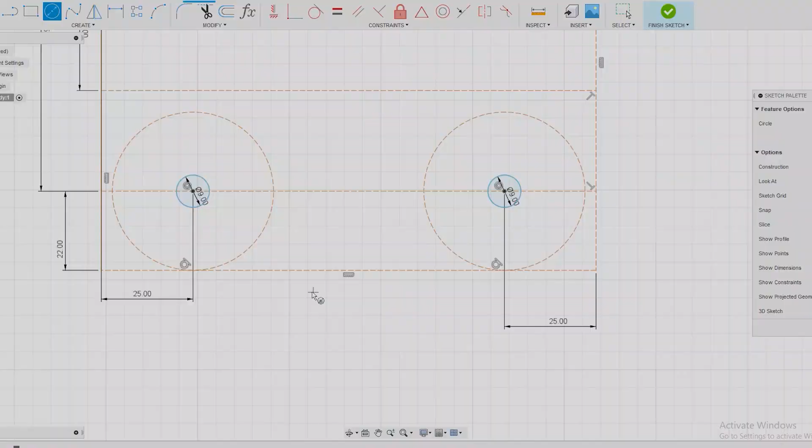Do you have an urge to design a CNC project from scratch on your own, but you don't know where to start? In this video we'll be going from the very first steps of getting started till having the project complete and ready for use. I will be sharing some tips to help you avoid the mistakes that most people make when first designing.

In this video we are going to learn 3 things. First, what do you need to know before designing? How to keep your sketches simple and organized, and how to prepare your design for CNC cutting.

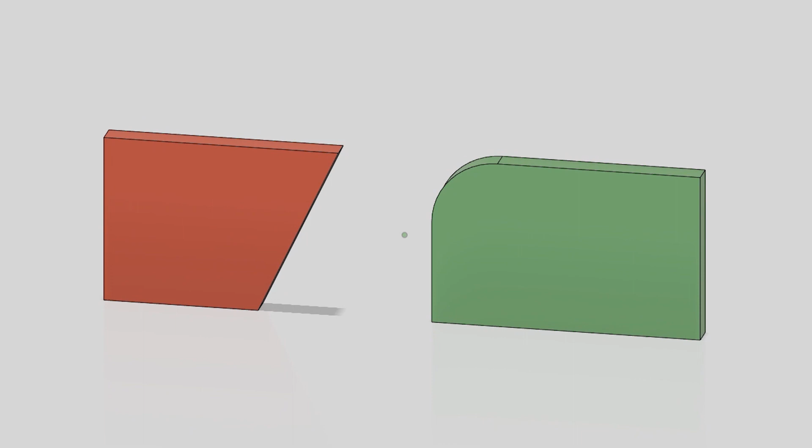In this case, the item will be obviously used by kids, so we should avoid sharp corners. The kids have small hands and it should be easy for them to grip the car. Also, it should be fun to play with.

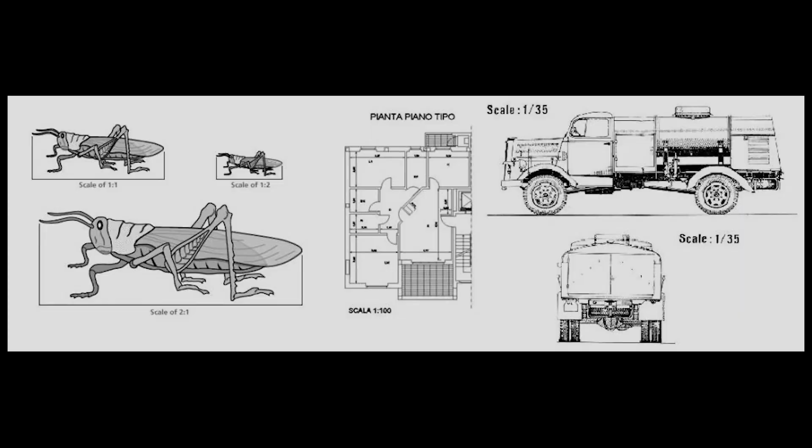For all projects, it's important to do a little research to find out what's already been done, what mistakes other designers have made, and what are the things you could improve to make your design more interesting, more attractive, and functionally better. At this point, it's also important to understand the dimensions, how big the car model should be.

It's important to get the size right, so the car isn't too big or too small. For some projects it's really easy to find standard sizes, but there are times when all you have is a picture of the item and you have to figure out the dimensions by yourself.

When you have the specifics down, it's essential that you know exactly what material you will be using for your project, so you can consider how it's going to be made and what tools you will need to finish the project. And it's something you have to keep in mind while modeling the components.

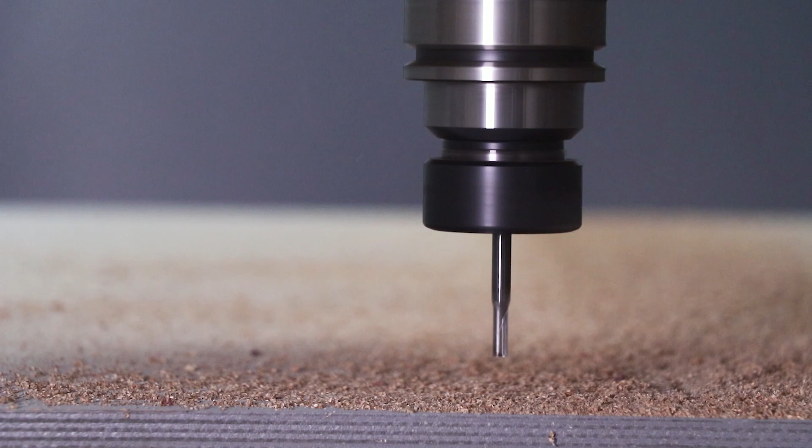For this toy car, we will be using 18mm plywood that can be easily cut with a 6mm router bit. Also, for the wheel axis, we could use 8mm dowels that are available in every wood shop. When you know exactly what you're gonna make and the materials and tools you will be using, it's time to start modeling.

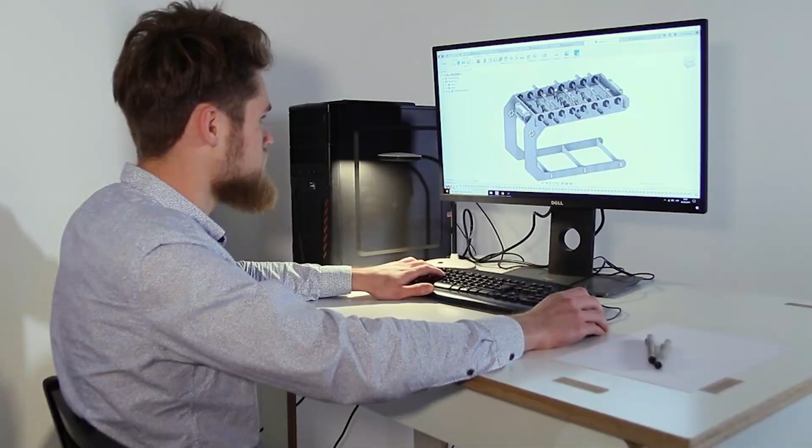Personally, for most of my projects I'm using Fusion 360, but there are some ideas and principles that you can implement in different software as well. First of all, it's extremely important to keep everything organized.

If you are using Fusion 360, keep every part as a separate component. It's easier to find it and edit them if you need to. If you are using different software, using layers is a great option. Also, I strongly recommend naming the components or layers correctly and not using random symbols.

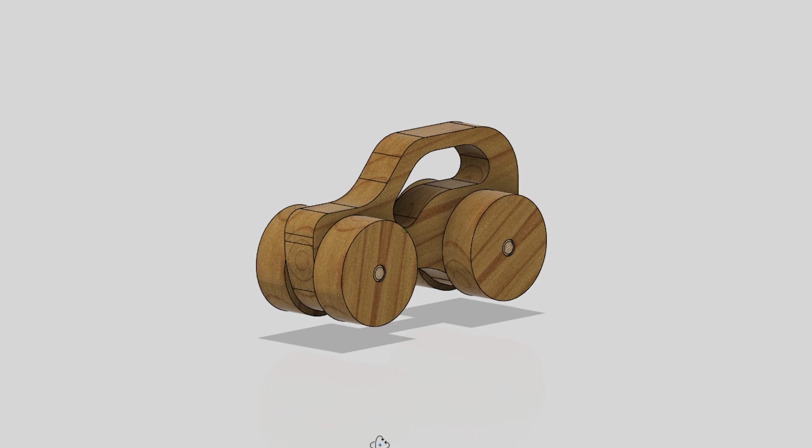It may not matter for a small project like a toy car, but it really does when modeling more complex items with more components. I will not talk much about the sketching itself in this video, but learning and understanding the tools you have available in your software can make the work way faster and more enjoyable.

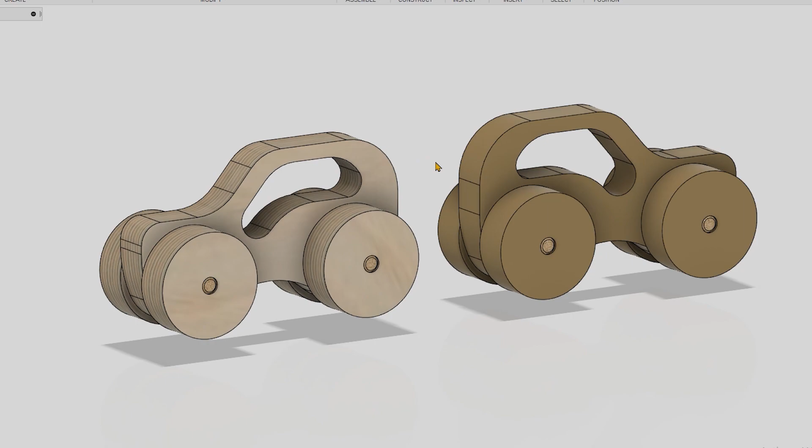Also, understanding the material is essential, so you know how detailed you can make the components and whether they will be durable in the long term. For example, this section would be fragile if made using an MDF board, but when using plywood it should last for years.

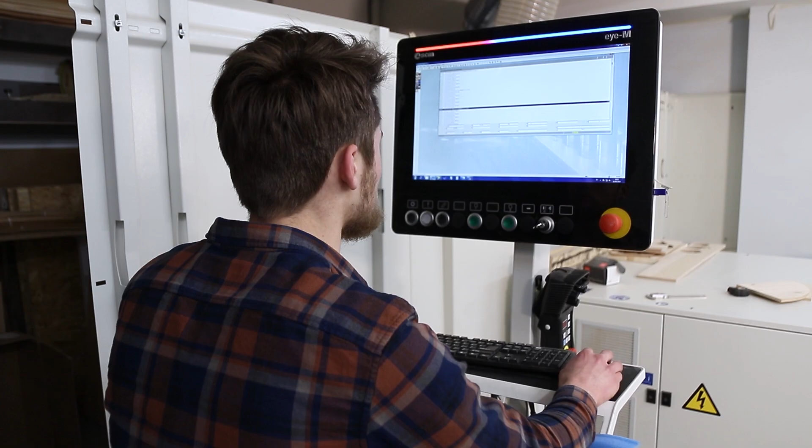Let's go to the part where we prepare the design for your CAM software. This is fairly simple to do, since we need only the outlines to make the toy car. However, there are some things to consider before exporting the DXF file.

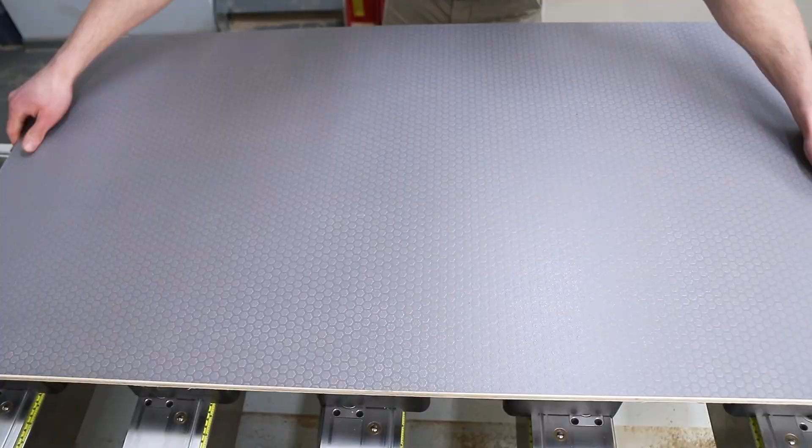At this point we have to know how we are going to attach the material to your CNC table, so we can take into consideration, for example, the location of screws or vacuum cups, so we are sure we don't hit them while cutting.

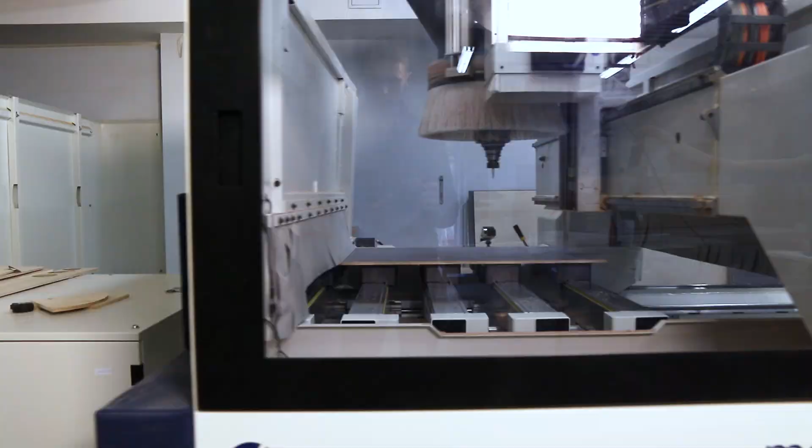Also, the distance between components is very important. To ensure the best quality of cut, it's recommended to leave a little offcut between the components. The size of the offcut can vary based on the way you attach the material to your CNC table.

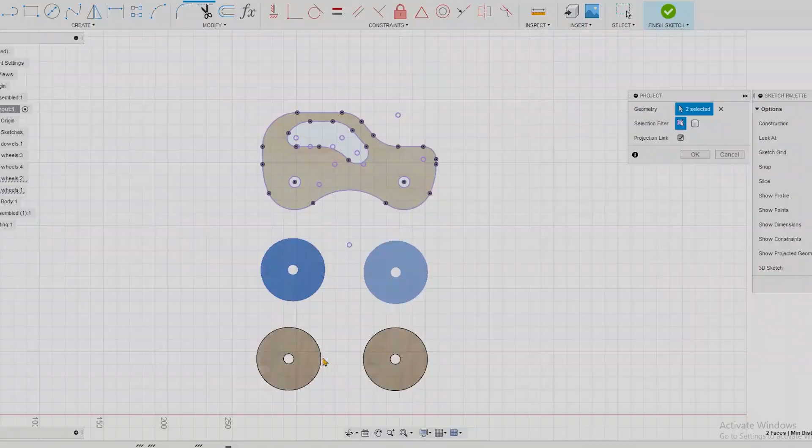In this case, we are going to use a 6mm router bit, so I think the minimal distance between the parts should be at least 15mm. After a quick checkup, the DXF file is ready for CAM software.

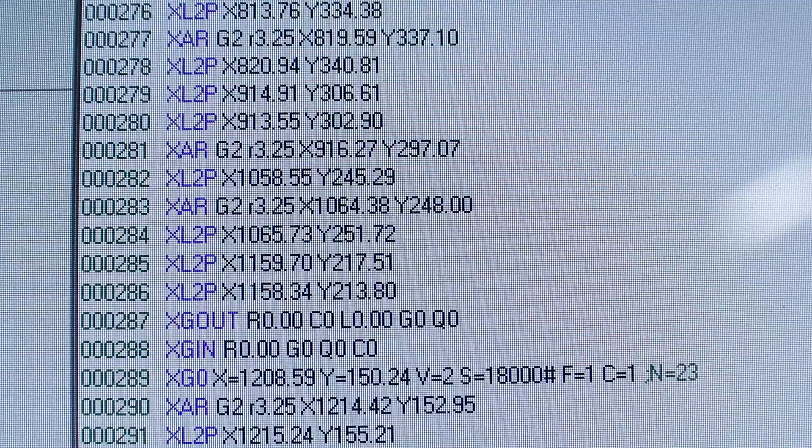Then it's only a matter of getting the G-code ready and cutting the components. After it's done, you can simply assemble the project and see whether everything works as planned. Congratulations, you have successfully made your design.